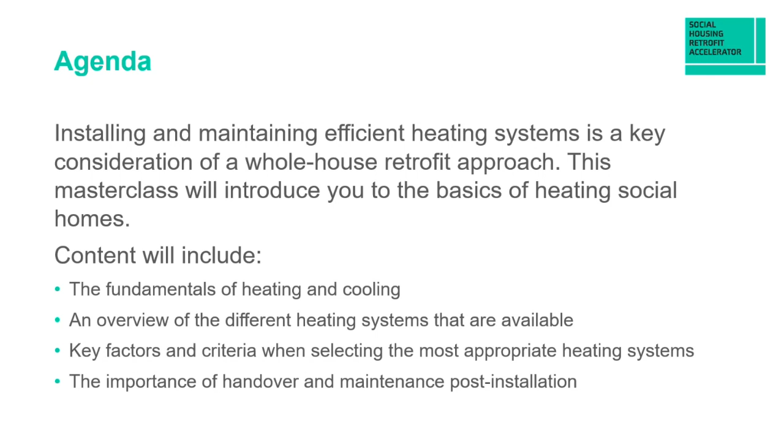When we consider the future of heating in UK buildings, what we've really got to think about is how is this going to be an important part of the climate change agenda? We're going to be thinking about it in terms of reducing CO2 emissions. So by 2050, really reducing the amount of carbon that is associated with our heating in homes. This is taken from the Committee on Climate Change, and I would advise anyone to have a look at this in terms of the progress to date, but also helping facilitate that move forwards.

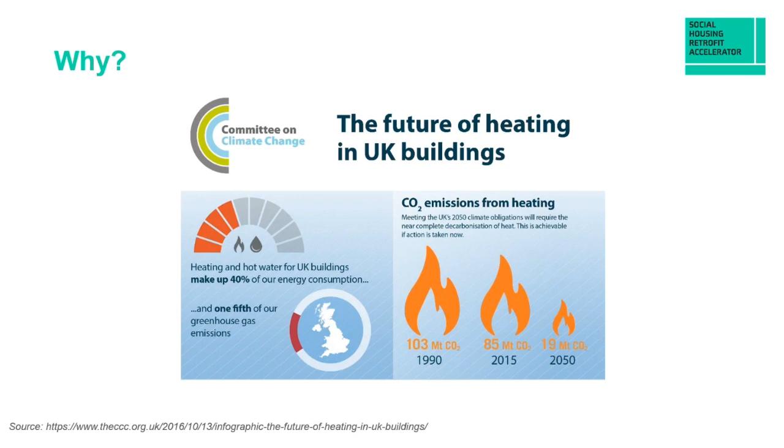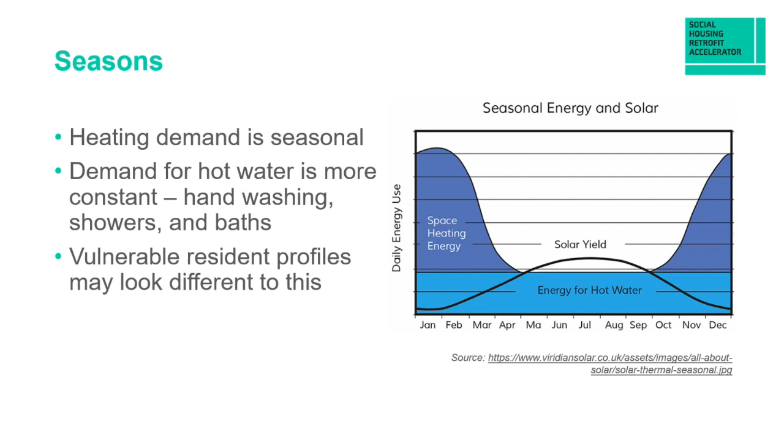Importantly, we also have the curve on here showing the solar yield. So that is the heat gain from the sun. Again, an important heat source to consider when we are doing that whole house retrofit approach. So thinking about windows, thinking about recesses, thinking about solar panelling, for example. When we think about our tenants, our occupants, and people who live in our homes, these will come from a whole range of different priorities. Our vulnerable residents, their profile might look very different to this. So again, that being specific to other homes is really important to consider. So again, understanding your tenant, understanding the property, really important.

When we are thinking about the actual kind of heating specification that we want, what we are trying to achieve is this level of thermal comfort for the occupants, for the activities that they are doing in the particular layout of that particular property. It is an important issue. It's one that we find important for ourselves in our own homes, but also in part of our work that we are addressing. There are a number of different heat emitters which can be utilised. Deciding which is best will absolutely depend on the type, age, construction, and the occupants of the building. So again, that comes back to my earlier point about knowing the property, who is in that property and who needs to be kept warm when they need that heating.

We have the influence of heat loss and heat gain in our properties. So again, that fabric first approach, that whole house retrofit philosophy, thinking about preventing that heat loss in winter, maximizing heat gain when we can as well during the winter months, so that we are utilizing essentially that free energy.

Whichever heating system you do pick, it should absolutely be designed to make sure that you are going to be kept warm when you need it. In the UK, we have our heating season, and so it's about thinking how we design our homes to maximise that ability to maintain warmth at a particular stage.

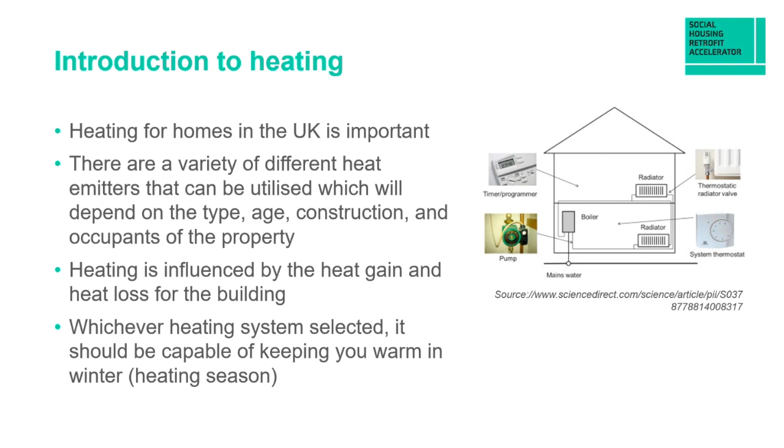For the purpose of this session, we're very much looking about the providing of heat to homes. What we do know is that the UK has some of the leakiest homes, so we're heating the space, we're heating the air, and then we are losing that as a result of leaks throughout the home. This could be through junctions around windows, around doors, not insulating the roof, and so addressing this thermal efficiency around the fabric is really important before we consider what heating options we should be putting in.

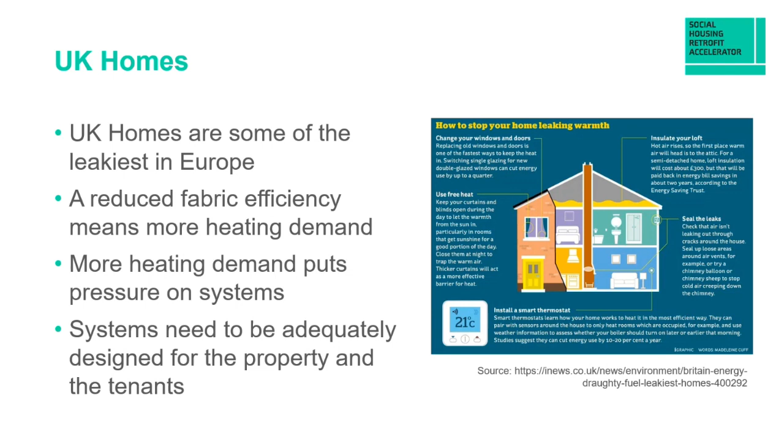More heating demand does put pressure on the system, so pulling energy from the grid if it is an electricity-based source, or even on the gas grid if it is a gas boiler at the moment, before those are rolled out. What we do need to think about is that system should truly reflect that heating demand in that property. It is a really important point to consider.

And this is especially true when you think about who is in there. I've got 3 organisations up on the slide here in terms of what they are dictating in terms of the temperature that needs to be offered. So we've got the Energy Saving Trust, we've got the World Health Organization, and we've got Age UK. So all of them are discussing this very similar temperatures.

Energy Saving Trust is looking at between 18 and 21 degrees in winter. World Health Organization, and importantly, their point is around 18 degrees for healthy and well-dressed people. So they're very much making that distinction around someone who is not vulnerable, someone who doesn't have underlying health issues. It's around making sure that it is someone who is healthy and has that ability to maintain heat as well.

Age UK then suggests, so again, thinking about vulnerable tenants, older people should heat their living area to around 21 degrees, while the rest of the home at 18. Again, individuals will have different requirements. There might be specific medical needs that mean that these have to be higher or indeed lower. So again, use this as a guide, use these organisations as a way of spreading that information around what expectations are around that temperature.

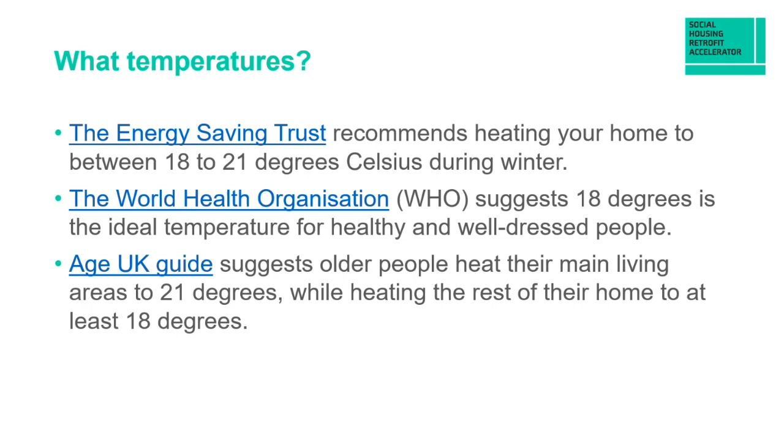So when we think about temperatures, these are some common sources that we have at present.

Okay, so moving forward, when we are thinking about a decarbonised heat perspective, we will be looking at different options. As we move towards different styles of buildings, as we look at whole scale retrofit, again, different options will be appropriate. So top left is kind of classic combi boiler, very common in lots of social and private homes across the UK. Although 1 million properties, homes across the UK aren't connected to the gas network. So again, we have those issues that may be in more rural areas, particularly in areas where they're not connected to the gas grid. This can be a particular interest.

Top right is then electrification. So again, moving to a decarbonised non-gas based system, things like electric panels, storage heaters, linking into mechanical ventilation with heat recovery, solar panels, utilising the roof space to then power any kind of heat emitter in the property.

Bottom left is solar panels, so a nice segue into self-generation. Having that south-facing roof can be really helpful in then having that self-supporting energy source to power whatever system. And again, we have on the bottom right, biomass or biofuel. Again, the appropriateness of planning requirements, the locality, the ability of getting fuel for those properties as well, and thinking about what is the most appropriate level of heating that the property can have.

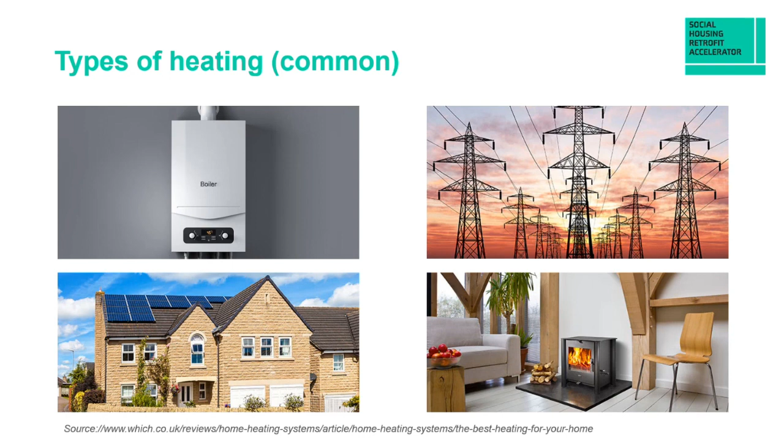So again, all of these will be dependent on kind of planning rules, planning regulations, planning frameworks that might exist within your particular local area.

What's really important when we are deciding about what type of heating, and this is very general, is what is that construction type, what is the fabric, is it Wimpey no-fines, is it a historical building, is it 10 years old? Thinking about the age and the structure is really important in understanding how that system might get into that property, and what connections, what transmission factors we need to be thinking about.

Thinking about the occupants themselves, the ability to use the heating system. In the resident engagement sessions that we do, we talk about the occupant and understanding the occupant in terms of their vulnerability, talking about language, talking about permitting access to properties, all really important when we're thinking about heating systems as well, in terms of understanding how that particular person might be able to access and drive their heating system.

We're going to be talking about digital connectivity in a couple of months, but again, if we're putting a system in that has an app and that person doesn't have a smartphone, they then won't have an app to control that heating system, and that's going to lead to significant problems. So really making sure that it is part of that process in designating what heating system.

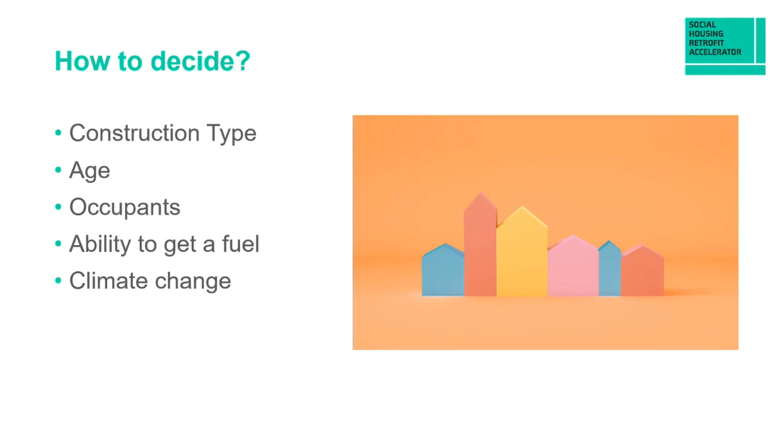We also have to think about climate change, so decarbonising the heating systems, moving away from burning something, utilising fossil fuels. So even with electricity use, a lot of electricity in the UK at the moment is created from gas-powered power stations. So how do we move towards that? This comes back to the philosophy of whole house retrofit, dealing with those issues around different properties that might exist. So when we're thinking about this, really important.

What we might think about is with more people who are working from home, we might see that this trend is actually slightly different. However, what we do generally see is that before 8 o'clock, we have peaks in that demand. And then after 4 or 5 o'clock in the evening, again, we have those peaks in that heating demand. So again, thinking about how that might influence our heating choice and where we might utilise that particular element.

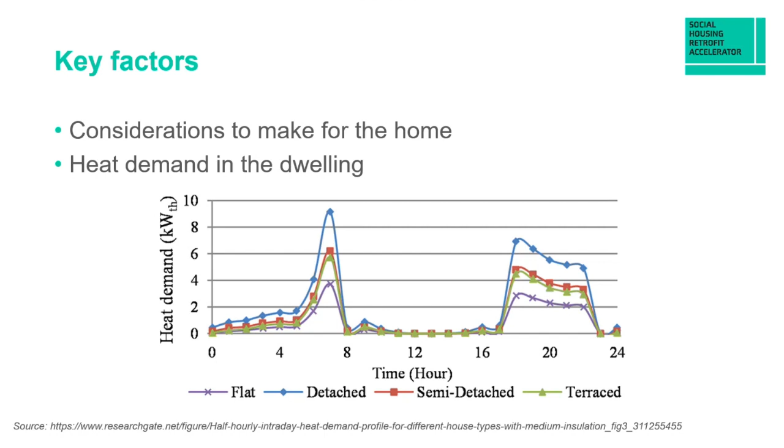So we've got to think about the dwelling in particular. We've got to be focused on what options might exist, but also considering those whole house retrofit options that might have also been installed. So some of the key questions to ask any design team, the retrofit coordinator, retrofit designer, site manager, any contractors that you are involving in your process, is actually understanding how much heat is going to be needed. To do that assessment, you need a suitably qualified person to really understand what is going to be the heating need.

So again, understanding who is going to be in it, any particular vulnerabilities that they might have, and detailed calculations need to be made to consider a whole range of different factors. So construction is important in there. The amount of glazing, the amount of doors, the fabric utilised. So is it an off-site construction? Is it a 19th century stone cottage? Whatever it might be, it's understanding the details of that.

We also want to be trying to understand estimates of heating costs. Now, with a fluctuating energy market, this is slightly more difficult to do. What we need to understand is how much this is likely to cost the person who's living there. So understanding how that might look in terms of future markets as well is a helpful exercise. Thinking about fuel poverty, it might be something to link in if you have a particular team in your organisation that are addressing that issue.

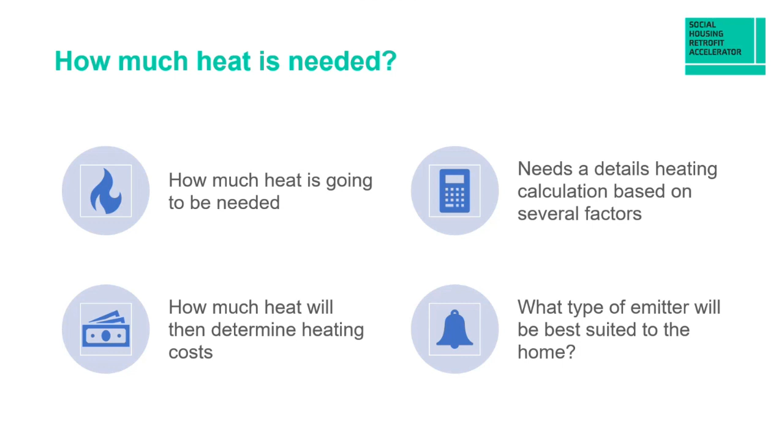This might be underfloor heating, or it might be radiators that are still appropriate. They might need some replacement or upgrades to the valves that are utilised there. Depending on the system you're utilising, some will need a hot water cylinder, some won't.

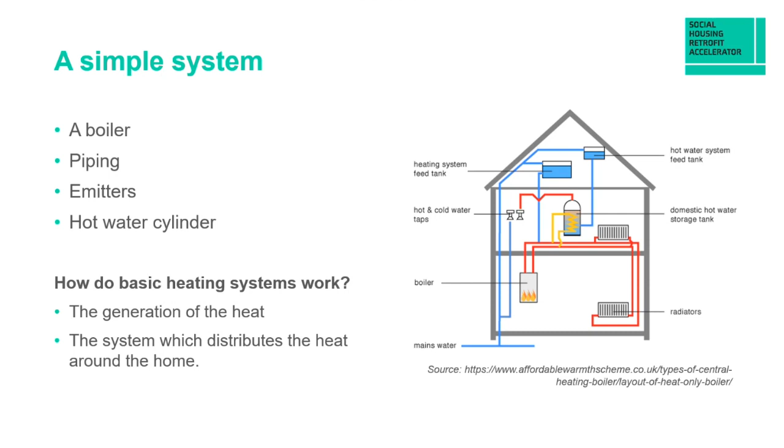Again, thinking about different systems you might consider, and this is all connected into the house, utilising the ability to get the heat going around the property. So we have that generation of heat, and we have that system which distributes the heat around the home. When we're thinking about it, these are some common examples, and there are other ones available.

This is taken from research and from us working on the SHRA project in terms of what is being installed at the moment. But there are lots of specific examples, and I would always look at the options to explore that. So radiators, underfloor heating and skirting board systems as well have been installed as examples.

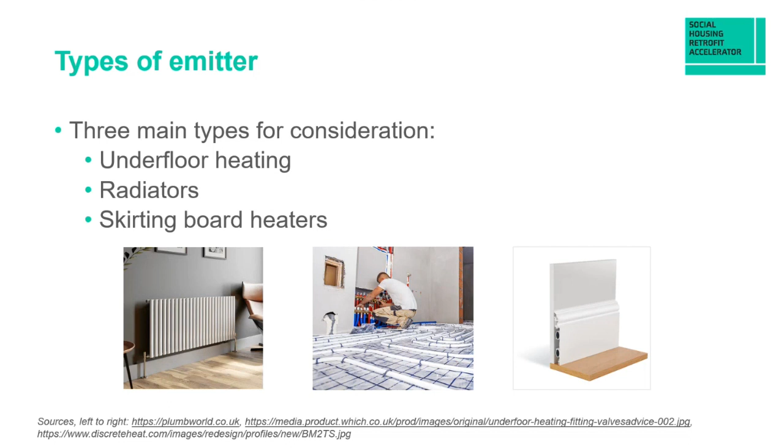Touching on the controls, which is a really important mechanism to think about. It's going to be dependent on the system you have installed, and it's important to understand the range of control that might be needed. So it might be around timers, it might be an app, it might be a wall-mounted unit.

When we're thinking about efficiency and wanting an efficient system, we don't want something that is just turned on and left on all day, not necessarily heating space which is being occupied. We want a system that is utilised by people in that property to keep them warm. The house isn't a human being and doesn't need that.

We need to heat the people and keep those people warm, because actually having that level of thermal comfort is known to improve health and well-being. So again, having that warmth is really important.

Controlling the ability to get that warmth to the people that need it in that property is part of the control philosophy. It's making sure that whoever is the tenant in that property, when there's been a heating upgrade or a change to the control systems, it might be around simply having controllable TRVs, thermostatic radiator valves. That might be a very simple project, or it might be a whole scale retrofit project.

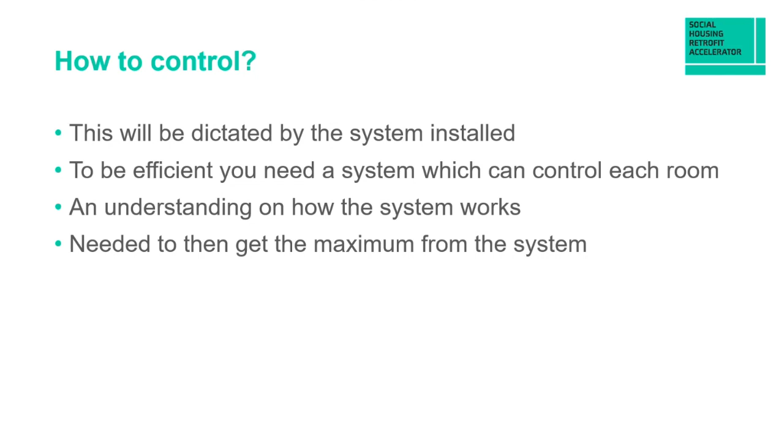It's really making sure there is an understanding of how that system is going to work, making sure the system performs as designed and gets the maximum out of it. So we're getting that output for the people that need it, when they need it, and where they need it.

There will be different types of systems that work in different settings. A flat will be different from a terrace, a semi-detached property in a rural location will be different to a city centre location. Really thinking about how we can talk through this. There are lots of different options, and we've only got an hour so we can't go through every particular one, but here are some examples of different heat emitters we can consider.

It's important to note that independent research should be done. Those of you who are Northwest based and wider might be familiar with the Energy House Labs at the University of Salford, who are doing a lot of research on different technology in different homes. They're working with some mainline and house builders on these particular projects as well.

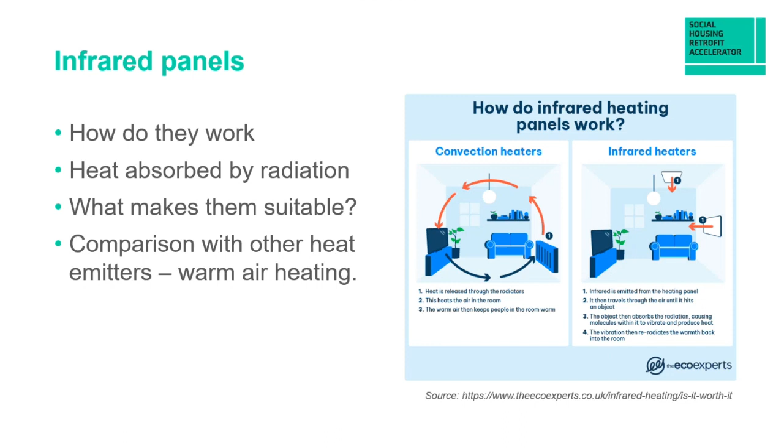So always look at the research, always read into the examples, making sure that contractors are utilising the TrustMark as well. So here we have an example of infrared panels, a different way of getting that heat into the room. It's really focusing on getting that heat to the person as well. Again, it will depend on the ability to get contractors in to do it. It will depend on the age and the structure and the tenants that are within that property. But again, it's another example that can be put forward.

Air source heat pumps are seeing a lot of deployment at the moment, and again, really successfully undertaken. There is a lot of research in terms of the appropriateness for lots of different properties. Again, make sure you're getting that research. Make sure you're getting a wide variety of quotes and options. You might have seen in the news recently about Octopus launching a particular version of their own heat pump. So look at the different options that might be available to you. You might have some examples that you have already utilised, and think about the different options.

There are also ground source heat pumps and air to water heat pumps. Again, depending on your locality, your planning requirements, the construction of the material of the building itself, they absolutely can be the right choice for your project. It is important to consider that the efficiency of the heat pump, particularly combined with on-site generation of electricity, can be really significant and see some real efficiency benefits. Thinking about installation, thinking about who's going to do that, making sure we're getting a variety of quotes.

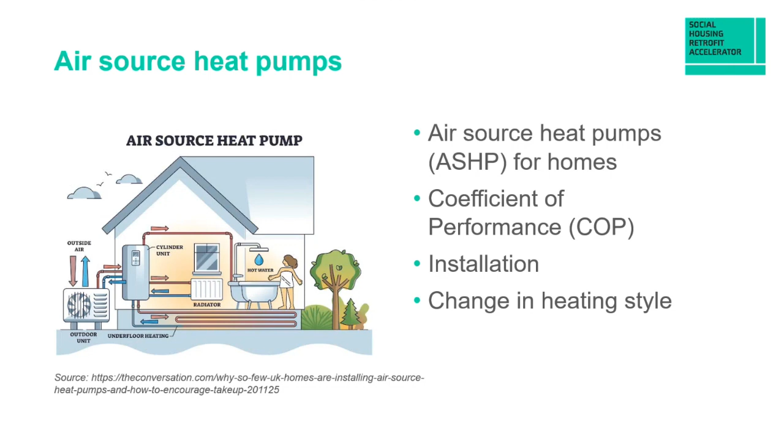Again, we've touched on this in terms of the resident engagement, having that understanding that the heat provided by air source heat pumps is a very different heat from, say, a gas boiler system. So it's about maintaining that temperature rather than having those peaks and troughs that quite often we are used to with a boiler-based system.

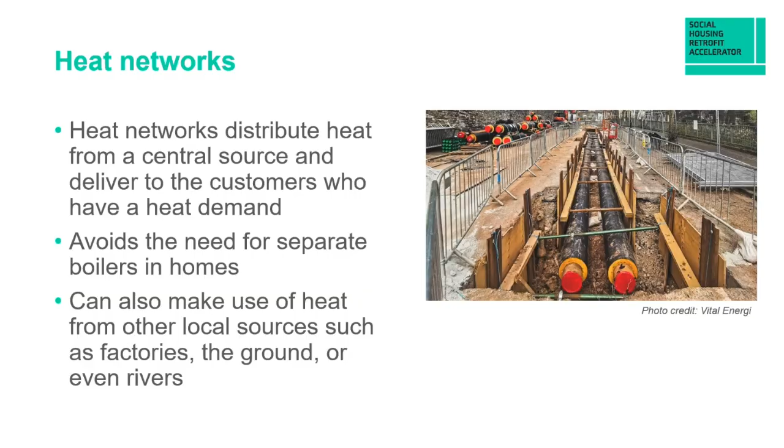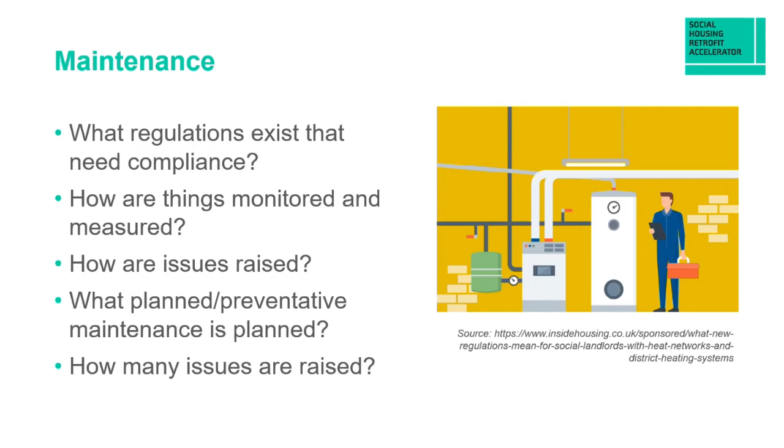So as we pull everything together, really thinking that heat demand is absolutely a seasonal thing. UK houses are designed for a heating load. So we've got to think about how we're going to get that heat into that property. Who needs that property to be warm? Are there vulnerable tenants that need to have a particular temperature maintained, particularly during winter months? Are there children? Are there elderly people? And how is this going to be maintained?

Thinking about it in terms of the estate and the portfolio that you hold, most organisations will have a very diverse portfolio, which will reflect in probably a variety of different heat emitters that have been installed, to a range of different comments from those tenants and those occupants. But it will absolutely depend on the different construction type, whether this is high rise, whether this is a long terrace, whether this is rural, semi-rural, even urban settings.

And the age of those properties will have led to different building regulations being deployed in terms of the design. So different U values in the fabric that will have been assigned, different amounts of glazing permitted as well. Changes to things like fire doors. So in more communal settings, thinking about the influence of the construction of that, and understanding as part of a whole house retrofit that all of those things need to be considered when thinking about changing the heating system that is going in. So it absolutely needs to be specific to that particular home.